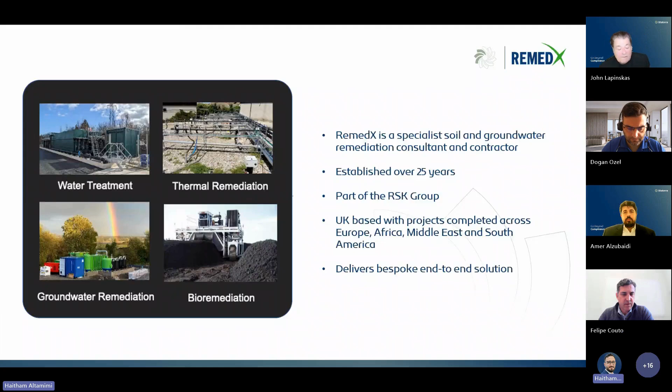So the challenge on that site really was, here we go, I got my, so if you could please skip to next, if you could skip next, please. Next. If you go into the principles, next one, please.

Here we go. So that's basically a catch up with John's presentation, as I mentioned. The key points when you're procuring, designing, implementing remediation that I believe you have to consider: one is having a very robust conceptual site model. And that's exactly what was well described on the different slides from John. You need a very good site investigation. You have to understand your soil, your groundwater, your contaminants, the environmental factors affecting your site, and the site constraints that will be affecting the remediation.

And a critical part of this process often involves laboratory and field trials to assess the viability of different technologies. And this is important because it provides critical information for the design, not only on the technical aspects in terms of treatability, but also likely timescales and costs. So that really helps reducing risks associated with your remediation scheme or the remediation program.

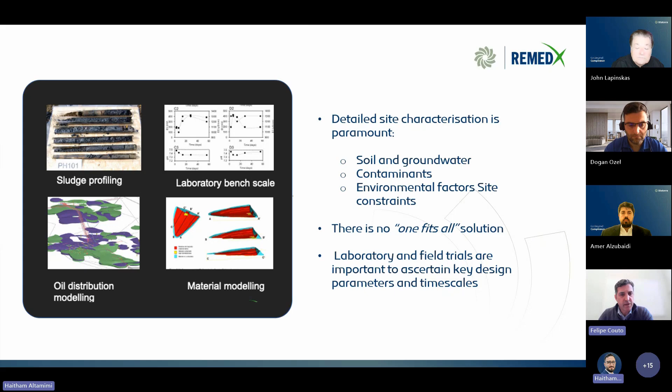We were then invited to revisit the site to look at options to enhance the remediation and move into completion or closure of the site. So we identified steam enhanced extraction as a potentially viable technology. The principle being that the steam would add temperature to the ground, heat the oil, reduce viscosity, increase recoverability, and with that, maximize removal. And so before we moved into the full scale implementation, we went through a process of detailed designing and trialing, which is on the next slide, please.

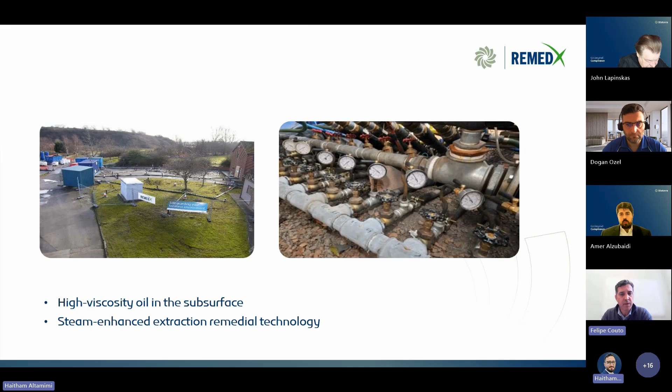And that is really important when it comes to the life cycle of a project, because you talk about energy to achieve temperatures. So if you understand the minimum temperature you have to achieve, you'll be spending less money on energy, and you make it more cost efficient and sustainable.

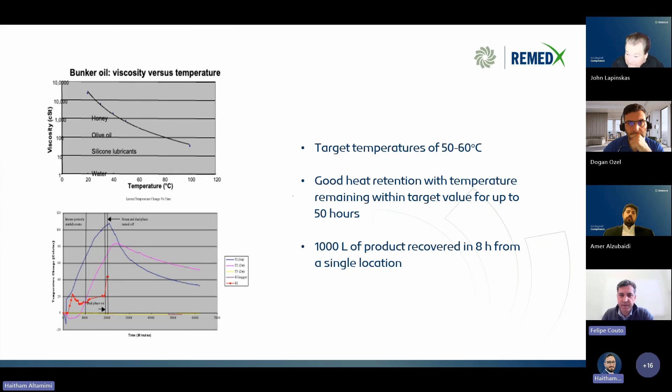And on this job, basically, we removed 130,000 liters over 50 months, reminding that we are removing from the subsurface, so it's a slower process when compared to removing from lagoons, but it was very effective and very successful. And the one key takeaway from this experience, if you transport this to your reality in the Middle East: point number one is that the recovery of high viscosity oils can be achieved under heated thermal enhanced conditions.

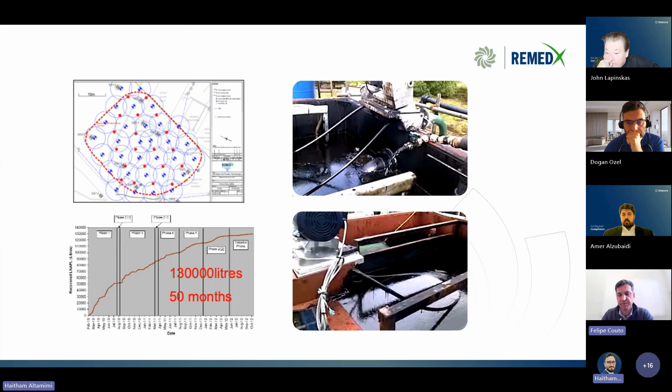In many cases, when you apply this in the Middle East, you may be looking to recover the crude to reintroduce it to your export pipeline. For this, normally you may have to add thinners and further separation processes so that you can remove the solid contents from your oil and then the water contents before it can actually be reused or recycled into the process. But it's a very effective, very successful way of recovering oils.

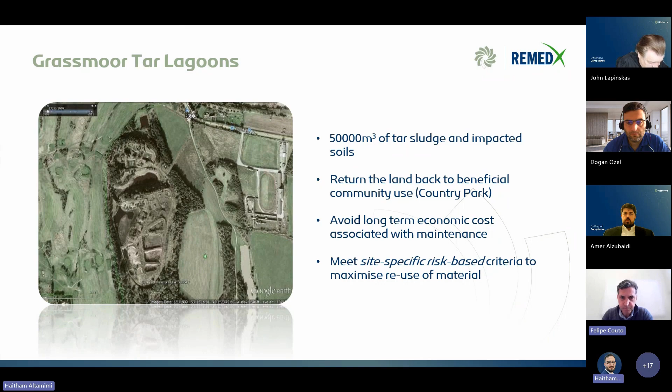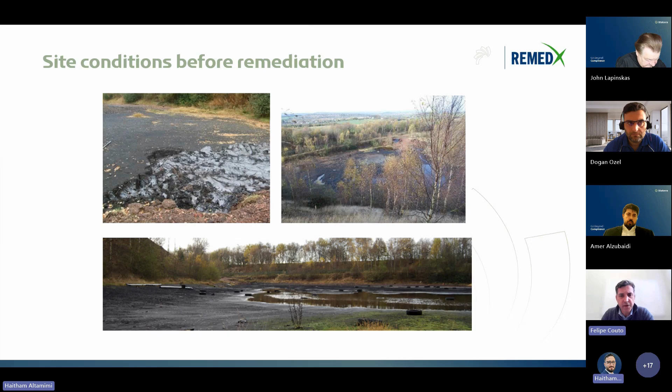So in order to progress with the full-scale remediation, we went through a design stage, and the design stage had two, or really three, main objectives. Number one, fully characterize the contamination, the sludge profiling, through a series of site investigations, drilling boreholes. In doing that, we could then assess the volume and the vertical and horizontal distribution of the contamination.

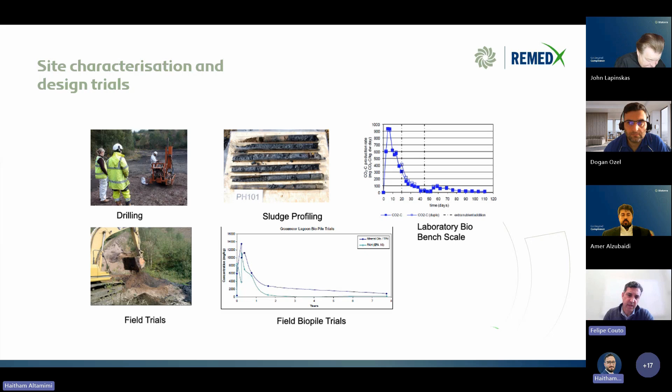The second part of the design stage was confirming whether bioremediation was viable. And for this, there was a combination of field biopile trials and laboratory bench scale trials looking at aerobic degradation. And in both cases, we could demonstrate that degradation could be achieved to meet the site-specific targets, but we also identified that we had to achieve the right blending of the tar sludge with the site's own material, so it could be aerated effectively. And that was also proved during field trials. Next slide, please.

So with the design stage completed, confirmation that bioremediation could achieve the mass reduction needed for the site, we move into the full-scale implementation. Before we could start the works, we had to dewater the lagoons. For these, we had a series of pumping locations where all the contaminated water and the floating oil could be pumped, passed through a water treatment system before discharging to the discharge location. And the system basically comprised oil water separation, then sand filtration and activated carbon treatment for the water.

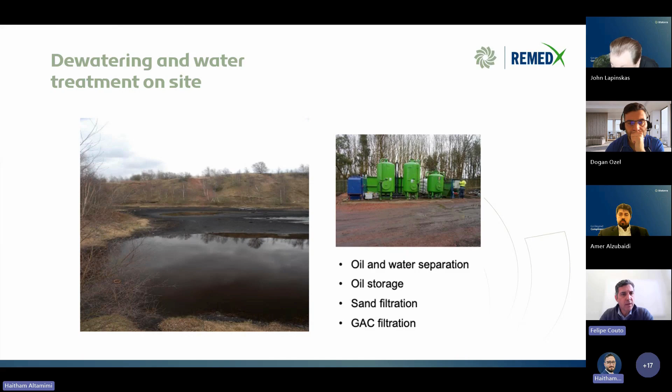Once dewatered, then we move into the full-scale implementation, which is in the next slide, please. So the remedial process is basically comprised into earthworks, the excavation of the sludge, the blending with the site-owned materials. We could achieve a 1 in 4, so basically 25% mass. That gave us a material that could be processed and aerated through windrowing.

So the windrowing, as you can see in the sequence, you use a machine called windrow turner. It's a compost machine, and basically what that does, it creates rows of soils which is mixed, homogenized, aerated, and then in part of that process, you can also add nutrients and moisture if needed. So the windrow turner is really effective when we have large areas, so you can achieve very high aeration rates and very high treatability or treatment rates over time.

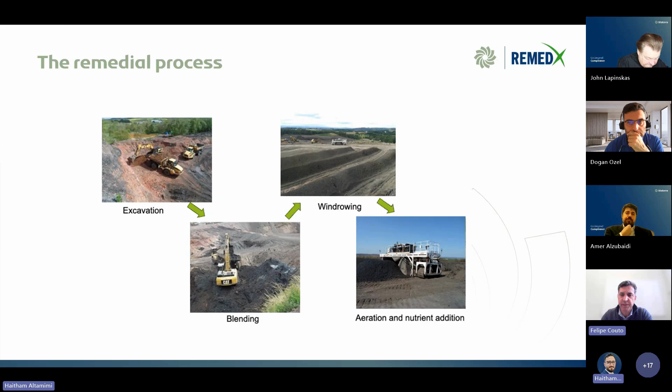Once those windrows are formed and the soil is aerated, then we move into the monitoring stage, which is the next slide, please, where we look into in situ and then lab testing. So on site, we test for VOCs, we test for moisture, which is really important for the microbial growth. We look at if there's the right temperature, oxygen, and then CO2 as well. So basically the balance between oxygen consumption, CO2 production is an indication that there is respiration taking place. Once the oxygen is depleted, then it's the point where the bio needs to be aerated again.

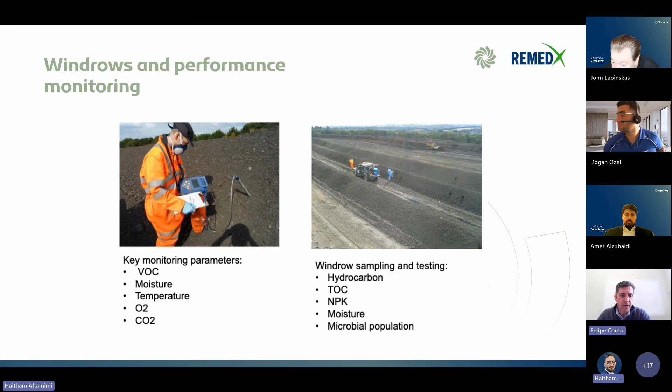And just moving to wrapping up, the conclusions from the job, at the end, we were able to treat 300,000 cubic meters of materials that were all treated and reused on site. As we were bioremediating, we were doing the landform formation, and at the very end of the job, the final landscape was just as you can see on the photo. Upon completion, we then cover with a final capping layer of a clean soil from where we could then place vegetation and grow different vegetations there. What that means is that we could then lead into increasing biodiversity. So that's something that's being looked at quite a lot in the UK at the moment. On this site, we could increase biodiversity by 10% through growing different flowers and plants and enhancing the growth of life. Next slide, please.

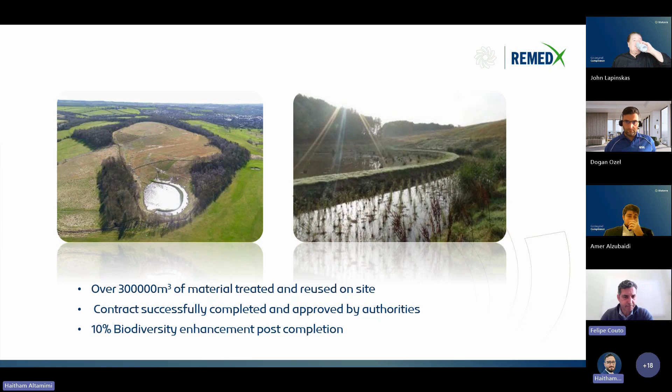And just in wrapping up on the bioremediation, some of the conclusions there. Bioremediation is a very effective technology. It works. It uses natural microorganisms. Often the bacteria is already present. It's very rare where you have to do augmentation. But what we really require is an understanding if the conditions are right, as was mentioned by John earlier as well. You need to check the temperatures, moisture, nutrients, and with all right and balanced, the microbes can thrive and degrade the contaminants.

Another key point here to consider, if you take this message away for application in the Middle East, where bioremediation has been effectively utilized, the key point really is that you require very careful design when you're doing the bioremediation. And you have to look into the right conditions of your site. Where in some areas we have excess water, in the Middle East, you may look into the moisture controls, you may look into salinity, some specific aspects that would potentially influence the bioremediation, the microbes growth. Other than that, it's a very viable technology for high viscosity, heavy end hydrocarbons. It can be widely applied across the globe.